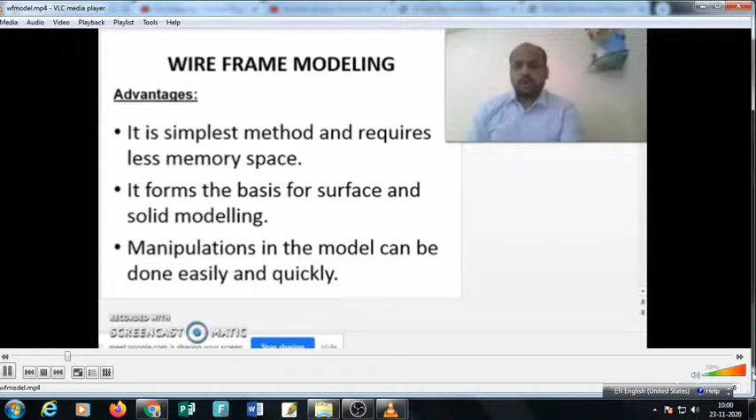Obviously these are having different applications. For example, if you want to draw the model of a car body, there is a different type of model. If you want to draw a model of a skeleton, there is a different type of model you have to select. So as per the application and representation of the model, we have to select the type of model accurately.

Now let us see what is this wireframe model. I will simply define it as generated with the help of points and curves. There is no surface and no solid in the wireframe model. Simply it is constructed with different points and curves, which prepares the model. You can simply call it as it represents the skeleton of the object.

Now what is its advantage? Obviously it is a simple method and requires less memory space, as it is generated with the help of points and curves. Obviously it will have less memory required in this modeling.

If you go to its forms, it forms the basis for surface and solid modeling. That is also true. Why? Because when you extrude one line, it becomes a surface. So the wireframe model is required for generating different surfaces, and from the surface you can generate the solid, and so on.

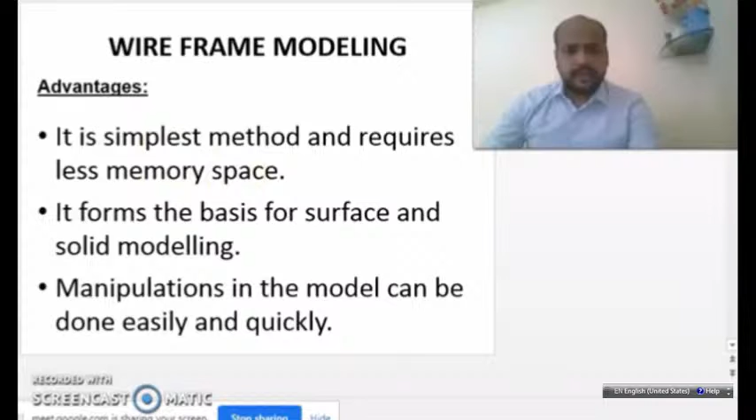Now let us see one diagram which represents the disadvantage of this wireframe model. This is one of the serious limitations in wireframe modeling, shown in this diagram: orientation and viewing plane. Due to this, it is very difficult to interpret the object from a particular viewing plane and it creates confusion.

If you see the object from this side, it will look different. If you see from this side, it will look different. If you see from this side, it will look different. It is okay because it is a view from different sides, but you cannot exactly interpret what is the orientation of this object. This is the problem.

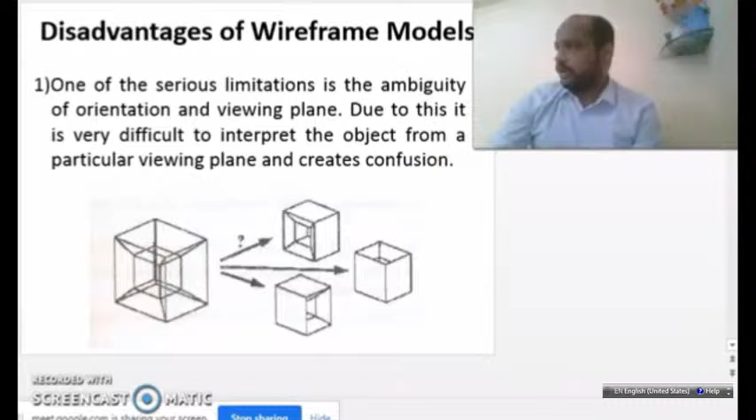Now we will go to the next point, another limitation: lack of information to determine object profiles such as a circle or curved surface.

If you see this diagram, it shows a curve here. There may be confusion whether it is a simple curve or a circle, whether it has a specific radius, and whether it has a center or not. You cannot easily determine what will be the center of this curve.

So it is quite difficult in wireframe modeling. If there is a curve, there must be a center—this is simple logic and straightforward—but it is difficult to identify the center of this curve. So this is one disadvantage of wireframe modeling.

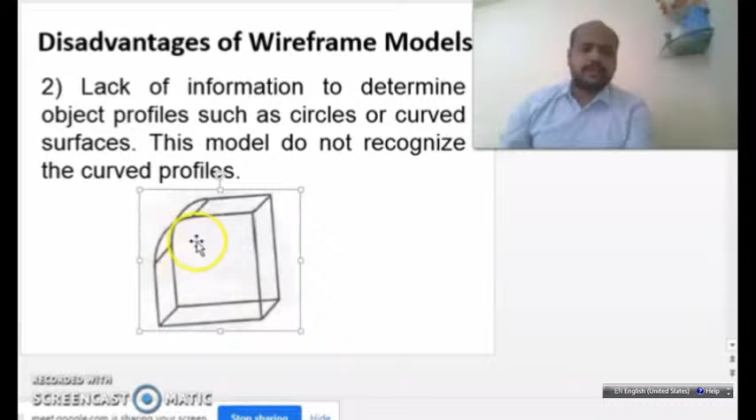Another disadvantage is that physical properties such as mass, surface area, volume, center of gravity, etc. are not possible to calculate.

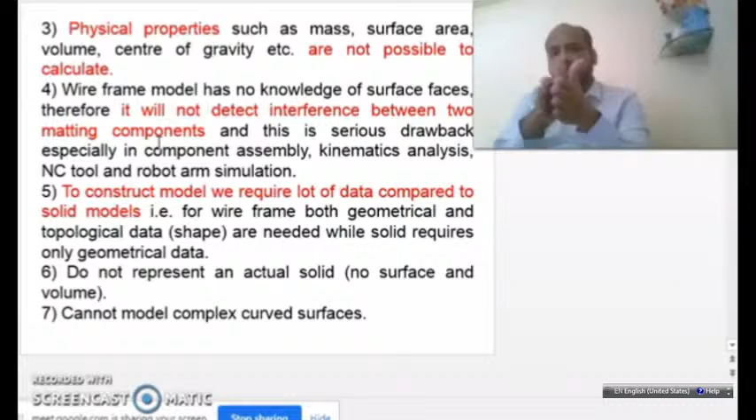Wireframe model has no knowledge of surface faces, therefore it will not detect the interference between two mating components. If there is one object here and another object, the common surface in between these two objects you cannot determine. This is a disadvantage, and it is very difficult to interpret. Obviously if there are two boxes joined together, it is difficult to understand which box the common surface belongs to in wireframe modeling. This is a serious drawback.

So therefore it is not implemented in NC tool manufacturing, or in robot arm simulation - these come under solid modeling. Then, to construct the model we require a lot of data compared to solid models.

I have experienced this a lot, because in initial days when I was using ANSYS software, when new versions were launched, their solid models were very difficult to draw. We used to enter the coordinates of points, then join those points. Likewise we used to waste a lot of time drawing simple models made up of points and lines. Nowadays it is simple to draw a model in CATIA, but earlier it was very difficult to import the model from CATIA software to ANSYS software. We used to draw models using point data and line data, structure by structure, and it was very time consuming.

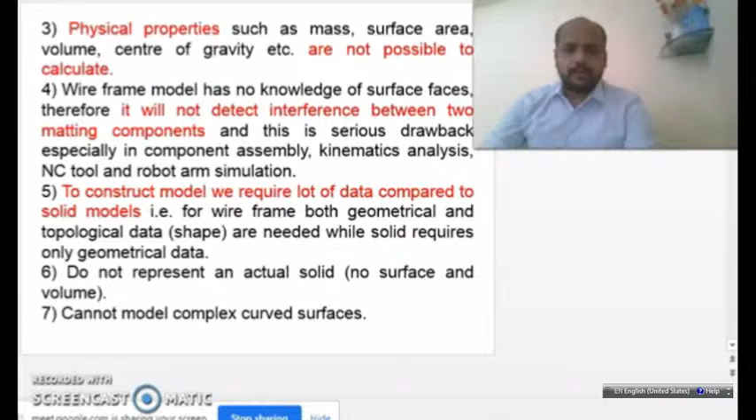Next type of modeling is surface modeling. We will see this shortly. Surface model represents just a surface, it does not represent a solid. Please keep this in mind. One simple example I will tell you.

There is one box and there is nothing inside the box. The box has different surfaces, so you cannot call it a solid. Obviously the surfaces have some desired less thickness value, but it does not represent a solid inside that box. Just an example I am telling you.

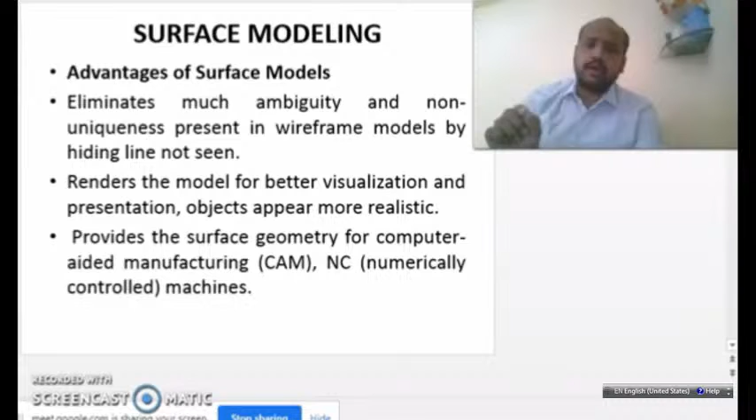So whenever you extrude a single line, it becomes a surface. Surface modeling, in short, you just remember one sentence: surface models are just used for representing the appearance and aesthetic of the object. In short, it is just used for representing the appearance of the model, how it looks. Rather, I will say it cannot be used for any kind of finite element analysis - it is just used for representing the appearance.

Please understand this. Now, advantage of surface model: it eliminates much ambiguity and non-uniqueness present in wireframe models, such as hidden lines. That lacuna is removed from wireframe modeling and improved in surface modeling. It renders the models for better visualization and presentation - objects appear more realistic. If you watch a drawing made using surface modeling, you must understand the exact appearance of that model. That is the importance of surface modeling.

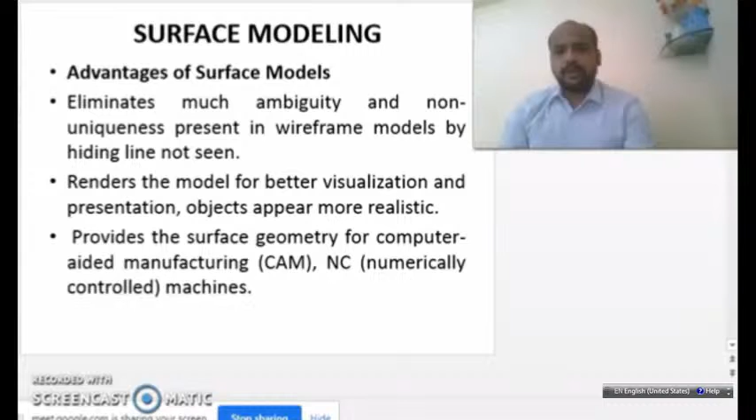Then it provides the geometry for computer aided manufacturing and NC machines. Obviously it is right - for computer aided manufacturing, you can feed the geometry into software for part programming also. So it is useful for CAM. Please understand, it is also asked in multiple choice questions many times, so remember this: it provides the surface geometry for computer aided manufacturing.

Then next, it provides the geometry needed by the manufacturing engineer for mold and die design. This is also correct - for different processes in manufacturing, you need to manufacture molds and dies, so surface modeling is required there.

Remember this point, this is also for multiple choice questions. Surface modeling can be used to design and analyze complex free-formed surfaces of ship hulls, aeroplanes, and car bodies. So complicated curves can be easily obtained in surface modeling, and this lacuna is removed and improved compared to wireframe modeling.

Surface properties such as roughness, color and reflectivity can be assigned and demonstrated. This is also an advantage of surface modeling. So just now I discussed the advantages of surface modeling. In the next lecture we will see types of solid model and its use nowadays, after covering wireframe modeling and surface modeling.

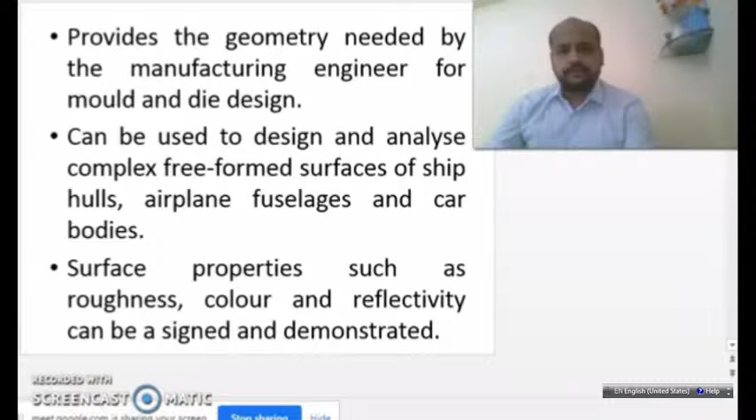So today we will see solid modeling. Actually it is a type of model in computer aided design. In CAD there are three types of models: wireframe model, surface model, and solid model. Right now we are going through solid modeling. For the other two types, wireframe model and surface model, you may see those videos on youtube.com.

Now let us see solid modeling. This is from chapter number 2, geometric modeling. In solid modeling, solid definition includes vertices, also called nodes, then edges, then surfaces, then weight of the object and volume. So these are the five parameters considered in solid modeling. So a solid model has surface, it has weight, it has volume, it has edge, and finally node. This is a solid model, and its applications nowadays are more than expectation.

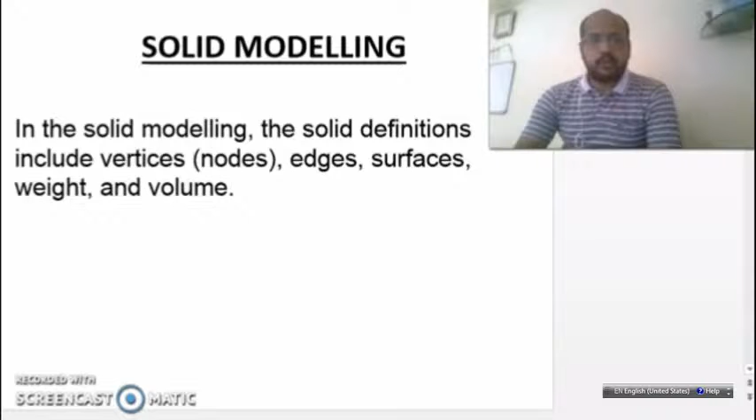Let us see the advantages and applications of solid model and what is the actual use of solid model. It has all the advantages of surface model, because surface model has uniqueness, and it is not difficult to understand. Solid models are more realistic, and they also have surface profiles, plus they consist of volumetric information.

For example, if you have drawn an assembly of different components in CATIA software in part modeling, you can easily find out its volume, you can find out its center of gravity. These things are easier to find in solid modeling. But in surface modeling, you can only see a surface, it just represents a surface. It does not give the value of volume of that object, so this is not applicable to surface modeling.

It allows the designer to create multiple options for design. Obviously, editing of the solid model nowadays is very easy, and you can modify such solid models very easily, quickly, fast, so you can have different options. Suppose you are drawing a piston and cylinder assembly in a software, you can easily modify the design of piston, design of cylinder, and easily change the diameters of that cylinder and piston, and match their dimensions. So these points become easier in solid modeling.

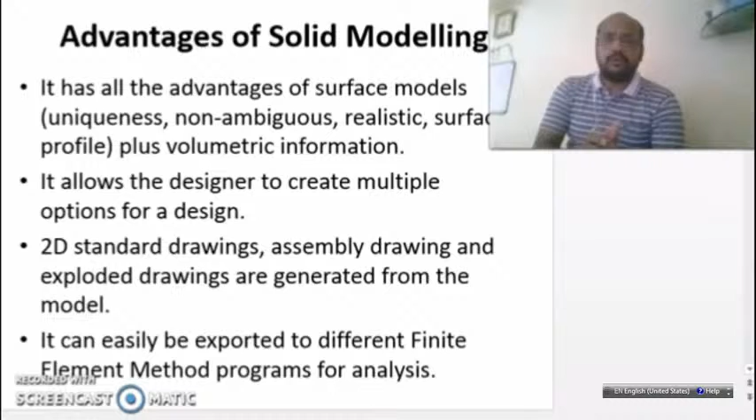Let us see the next advantage. It can be used in new manufacturing techniques: Computer Integrated Manufacturing (CIM), Computer Aided Manufacturing (CAM), and Design for Manufacturability (DFM). In all 3 of these applications, solid model is very useful. You can draw a solid model and also generate its part program.

This is a good advantage nowadays. You don't need to write a separate part program; later you can improve that part program, but this facility is available. In CIM, obviously it is there, you can implement CAD software. In CAM also you can implement CAD softwares. And DFM also consists of use of CAD softwares. So CAD software applications are unlimited, apart from these 3 you can also implement CAD softwares elsewhere.

Next point: volumetric and mass properties of an object can be easily obtained. As I told you at the start, you can calculate the volume of critically shaped components in one click. Mass properties you can obtain, and also you can obtain the center of gravity of that component.

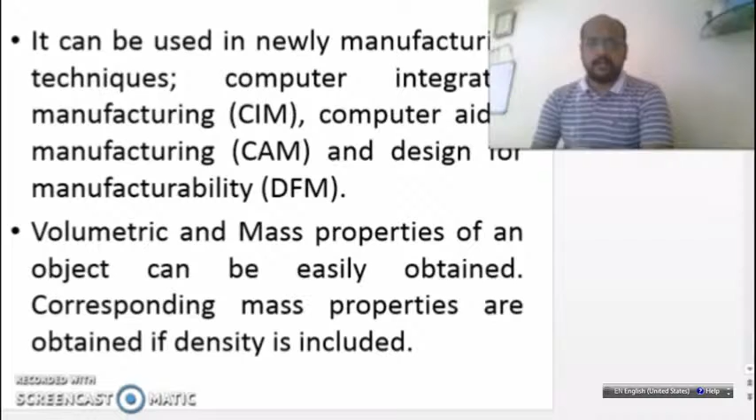Just remember this. Now, disadvantage of solid modeling: obviously it requires more intensive computation than wireframe and surface modeling. What does computation mean? Because it requires more space and more calculations in solid modeling. You require more space for saving solid models compared to wireframe and surface models, as it requires powerful computers.

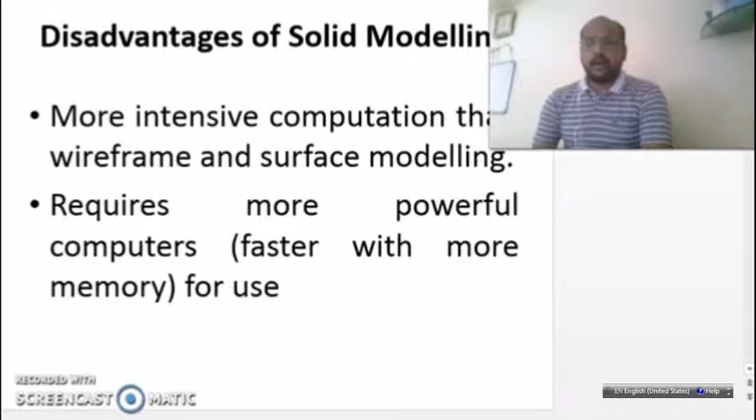I remember one experience - our students were drawing a solar vehicle model in CATIA software, and almost that file size was around 200 MB. Can you imagine this? 200 MB file size in CATIA software. It has taken almost...

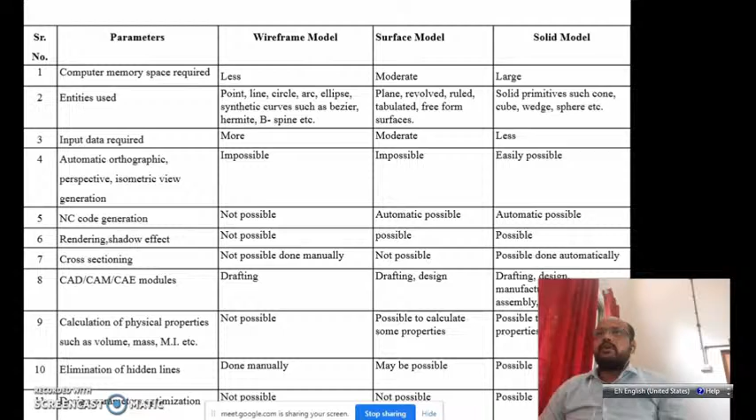Okay, today we'll see the difference among wireframe model, surface model, and solid model. Each has different applications that we have to analyze, and we have to choose a perfect application and type of model so that we can go ahead using different CAD softwares. First, let us see on which basis we are going to understand this difference.

So in this case, computer memory space required for wireframe model is less - you can see on this slide. A wireframe model requires less space, surface model requires moderate space, and solid model requires larger space to store the models in your computer.

So what entities are used in wireframe model? Point is used, line is used, circle is used, arc, ellipse, synthetic curves such as Bezier curve, Hermite curve, or B-spline curve. So these types of entities are specially used in wireframe modeling.

In case of surface model, planes are used, then revolved surfaces, ruled surfaces, tabulated surfaces, and free form surfaces are used. These types of surfaces are required in different types of car body shapes modeling or sheet metal modeling, so these surfaces are important in surface modeling.

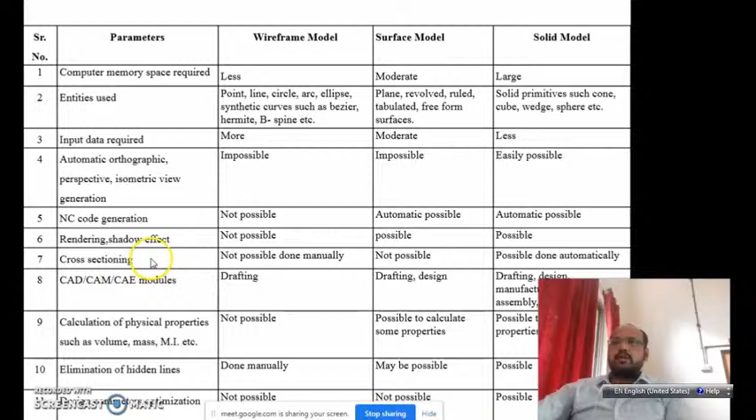Next parameter is NC code generation. NC generation is not possible in case of wireframe model. NC code generation means writing a part program - those codes related to part program cannot be generated by using a wireframe model. In case of surface model it is automatically possible - surface model helps us generate or write a part program using different components. Similarly, solid model is also useful to generate components and to generate them correctly.

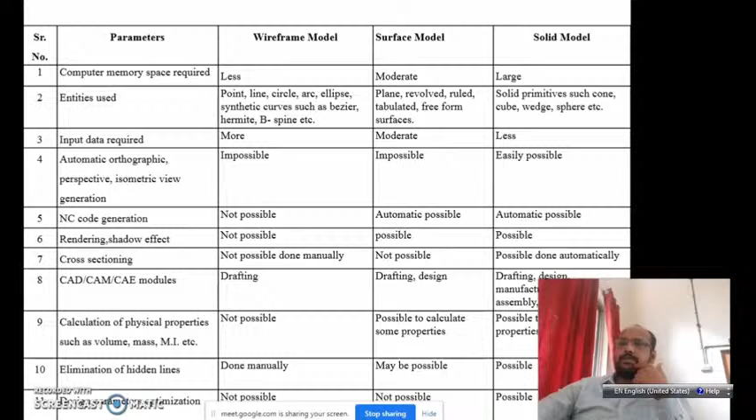Next parameter is rendering shadow effect. This is not possible in wireframe modeling, but it is possible in surface model and also possible in solid modeling. So shadow effects cannot be given in wireframe model, because the wireframe model itself is a skeleton - it does not represent a surface, so it will not have any kind of shadow or rendering effect.

Rendering effect means you can give different colors and apply different types of materials on the CAD model. This is possible in case of surface model - you can give different colors and apply different materials on it. Also you can apply different types of materials on a solid model, and there you can generate a shadow effect.

Next parameter is cross sectioning. In case of wireframe model, cross sectioning is not possible. It is not possible in case of surface model either, but it is possible in case of solid model.

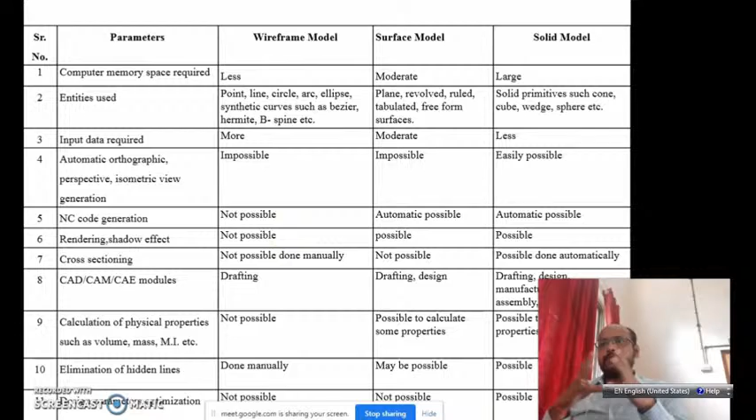Cross sectioning is not possible in case of wireframe model - it's straightforward, because wireframe model does not have sections. Surface model also does not have a section, because surface model just represents the outer surface - there is nothing inside that model, it just represents the external appearance of the object. So surface model will not have any kind of section.

But solid models allow you to generate sections automatically, and these features are available in CATIA software, Pro-E software, Solid Edge software, SolidWorks software, Unigraphics software. These are commonly used CAD softwares, and these facilities or features are available there.

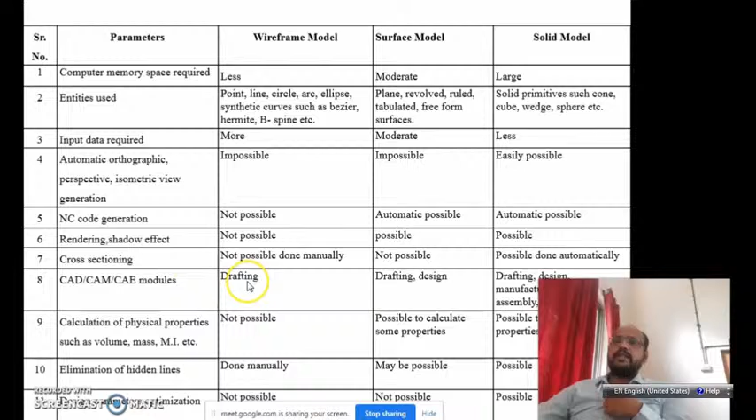Now we will see the next parameter - CAD, CAM, CAE modules. Drafting is possible in case of wireframe modeling. In case of surface modeling, both drafting and design are possible. But in case of solid model, drafting, then...

Design, manufacturing, analysis and assembly - these are possible in case of a solid model. Drafting is easily possible - if you draw an assembly of 1000 components, you can generate their front view, side view, top view very easily. Design is also possible in solid modeling, and finite element analysis is also possible. You can simulate different mechanisms using a solid model - this is a good advantage of solid modeling. So nowadays solid models are used worldwide for any kind of operations.

Even though solid models are also used for representing external appearance of the object rather than using surface models, because solid models are very easy and simple to draw. Right now, if you go to youtube.com and search different tutorials, you can easily learn how to draw a solid model. You don't need to go for different types of courses for that. So solid models are that much simple.

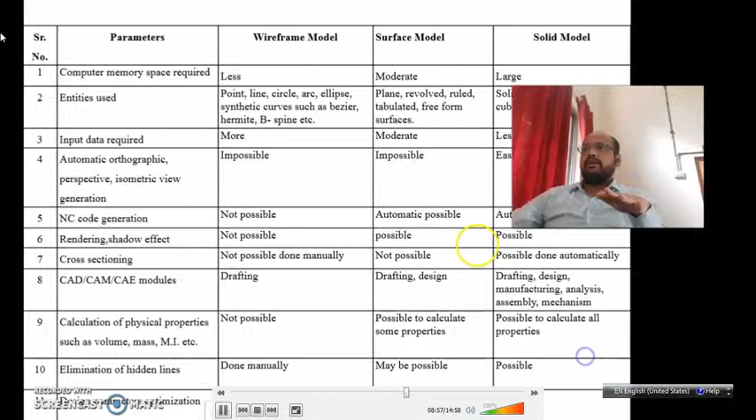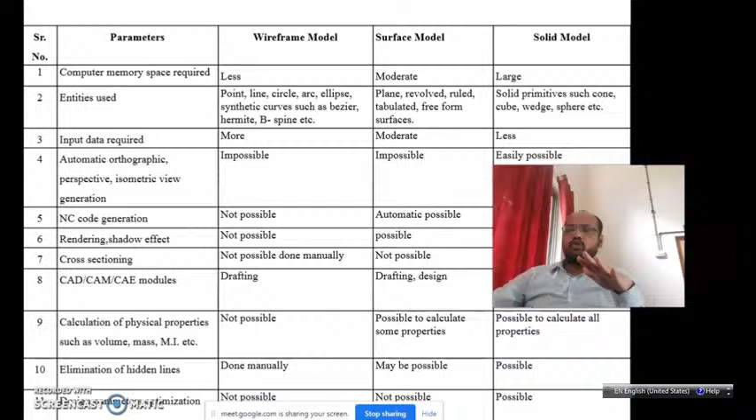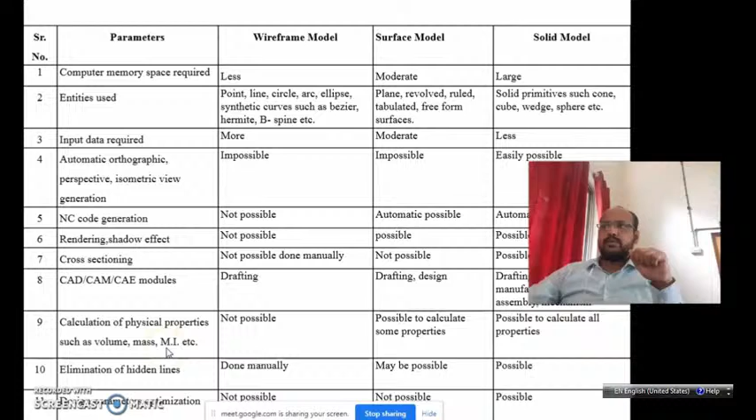Then the next parameter is calculating physical properties such as volume, mass, and moment of inertia. These physical properties are not possible to calculate by using wireframe model, but surface model can calculate only area, it cannot calculate moment of inertia. In case of a solid model, you can calculate all these properties: volume, mass, moment of inertia.

Then the next parameter is elimination of hidden lines. Elimination of hidden lines is not automatically possible in case of wireframe modeling. It is possible, but you have to do it manually, and obviously it is time consuming.

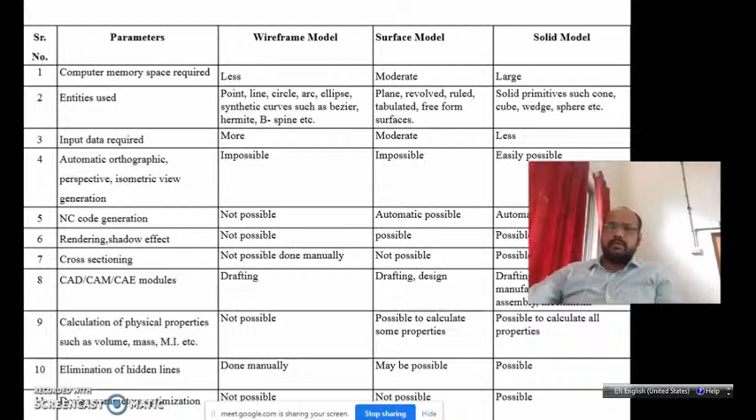Then in surface modeling, elimination of hidden lines may be possible, but that feature is provided in some softwares. In SolidWorks software, that feature is provided, and you can easily eliminate hidden lines in case of surface modeling. But in case of solid model, it is easily possible to eliminate hidden lines because it does not accept hidden lines itself. Solid models cannot be generated if you mention some hidden lines in modeling. So elimination of hidden lines happens automatically there, you don't need to do it separately. That is a good advantage of solid model.

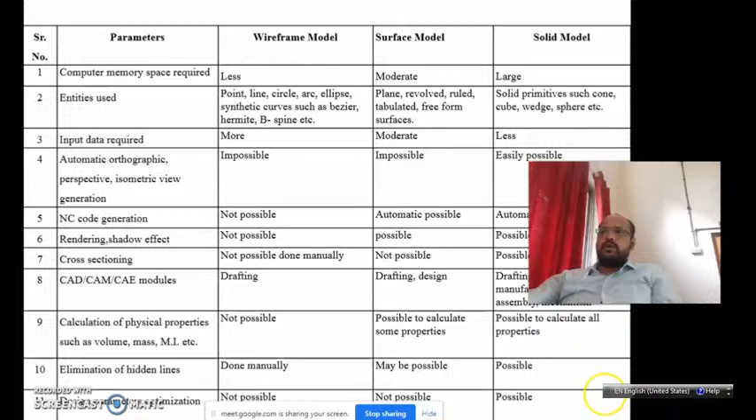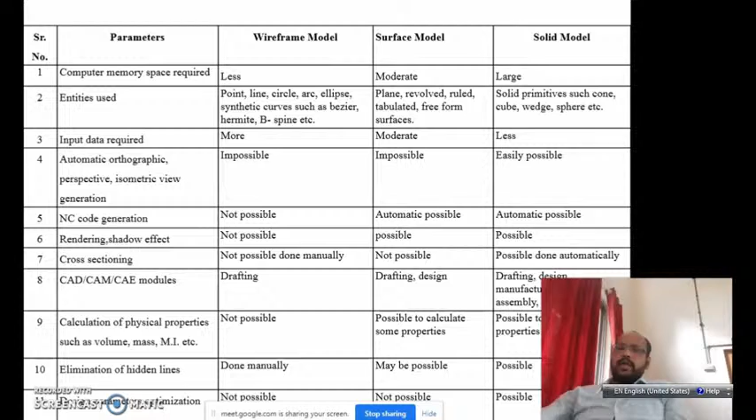Then design parameters optimization is not possible in case of wireframe model or surface model, but it is possible in case of solid model. Why are wireframe and surface models not suitable for parameter optimization? Because you cannot have physical properties, so you cannot use these models for finite element analysis purpose. But you can use solid model for finite element analysis, and go ahead for optimization purpose.

Surface model can be taken to finite element software, meaning ANSYS software can be used for analyzing surface model, but you need to provide some thickness to that surface. Then these surface models can be used for finite element analysis purpose.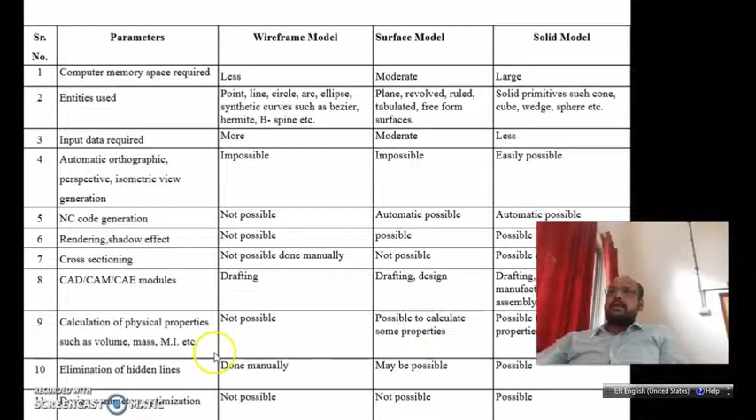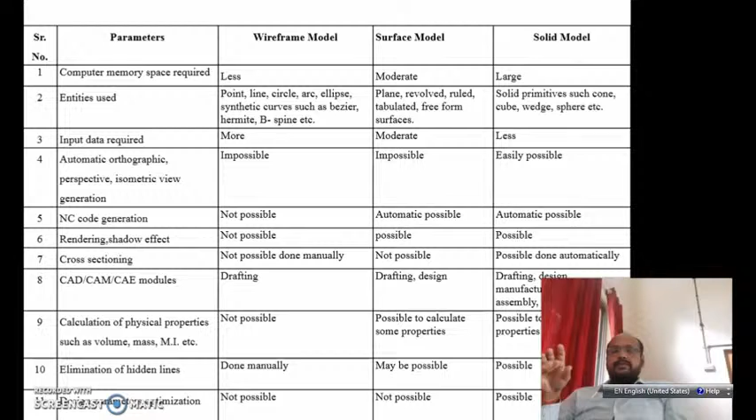You cannot use the wireframe model for detecting defects. Exact location of a defect cannot be determined in case of wireframe model. You can detect different defects by using a surface model, and also by using solid models. In case of surface model, exact location of defect is very difficult to identify. So wireframe model is not suitable for detecting defects. Surface model is suitable, solid model is suitable, but wireframe model is not suitable.

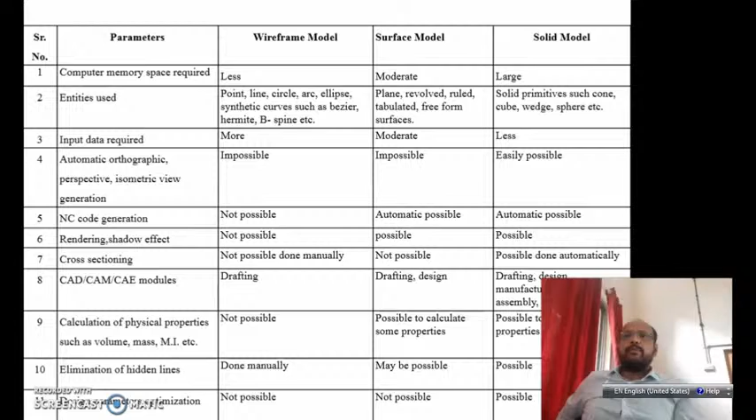Suppose there is some hair size crack in the model, that can only be determined by using solid model. You can generate its front view, side view, top view in the solid model, and easily see where the crack is happening. So the exact location is very simple to identify in case of solid model.

The speciality of solid model is that you can generate front view, side view, top view, as I discussed during CAD/CAM modules. Solid models are used for finite element analysis purpose in case of CAD softwares also. You may be under the impression that only CAE softwares are used for finite element analysis, but in case of CAD softwares like CATIA, SolidWorks, or Solid Edge, basic types of finite element analysis can be performed in that software. So solid models are used worldwide.

Their drawback is that huge computation work is there. The processor has to work a lot. You need more RAM and large space is required to store the memory of different models. I remember almost a 150 MB size solar vehicle we had modeled years ago in CATIA software, and it took almost 15 minutes to open in the software. So solid models require large space.